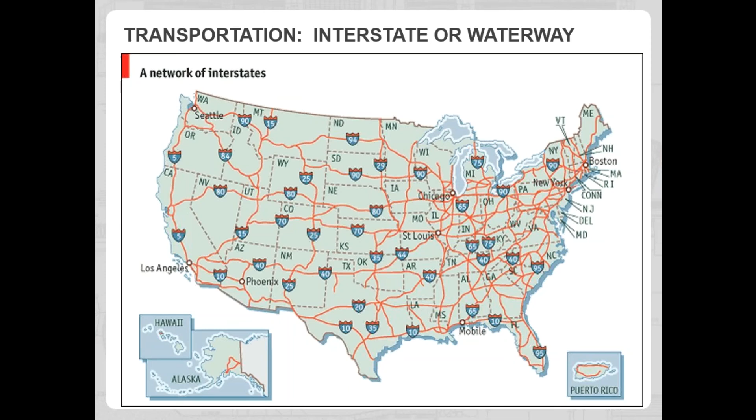Okay, so now let's get back to the Mississippi River. Here I want to point out the larger red circle that talks about the inland waterways, and that's what Chris is going to talk to you about, that larger system, the tribs, the Upper Miss and the Ohio River and their tribs that collectively come together for navigation and then down through the lower Mississippi River to the Gulf. And then we're going to talk specifically again on the lower Mississippi River, which is that yellow circle, with regards to the infrastructure that we have there, that hidden infrastructure. And with that, let me go ahead and toss it over to Chris, and we'll talk about navigation economics.

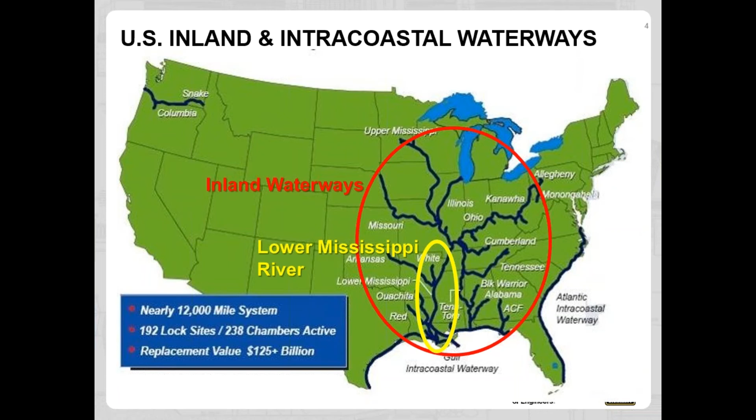My name is Chris Boko, and I've been an economist for the last 6 years with the Corps, dealing mostly with this hidden transportation system that Elizabeth talked about. So my purpose today is just to give a brief overview and an introduction into this.

So as Elizabeth talked about, why is the inland waterway system the hidden system? Well, it's because you can see and feel the trucks on the road as you're driving down the interstates. You can hear the trains or even have to wait at a crossing for a while. But people often don't notice the tows moving past them on the river. So I'm going to introduce you to this hidden system through answering a series of basic questions.

The first question is, what is the inland waterway system? This slide shows what Elizabeth was talking about, and shows all the inland waterway systems throughout the U.S., spread mostly in the East and Midwest, but you also have the Columbia Snake in the West. You also have the Gulf Intracoastal Waterway along the Gulf, and then the Atlantic Intracoastal Waterway stretching up from Florida all the way to Virginia.

This is nearly 12,000 miles and authorized for 9 feet or greater. The yellow lines represent the shallow draft portions, which are less than 14 feet. And the blue sections, one on the lower Mississippi and one up on the Columbia, represent the deep draft portions, which are greater than 14 feet.

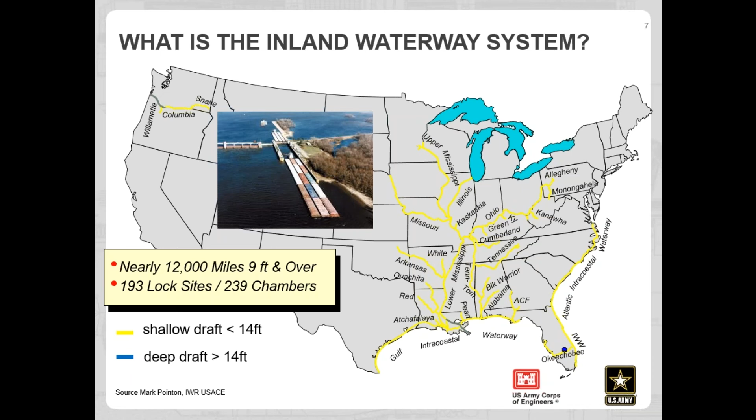So now that we've covered what the inland waterway system is, now we'll ask, well, how did it come to be?

Congress recognized that interstate commerce needed to be able to travel on these rivers all year round. So using the authority of the Commerce Clause of the Constitution, Congress tasked the Army Corps with building and maintaining the inland waterways system.

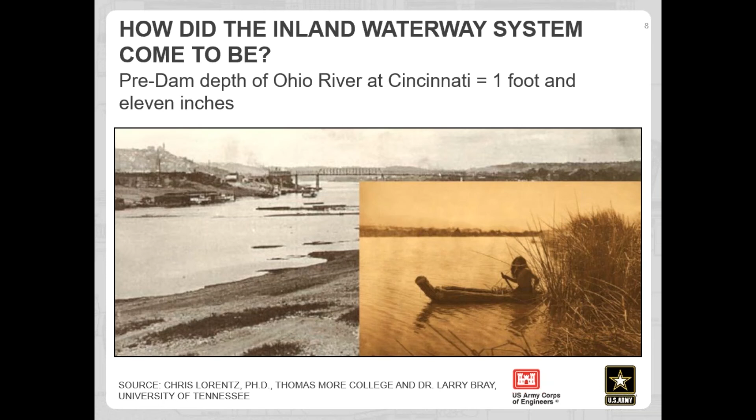The current project about to be completed is Olmsted Lock and Dam, which is right above the confluence of the Ohio River and the Mississippi River. Olmsted will actually be replacing the Ohio River Lock and Dam 52 and 53.

So now that we've asked what the inland waterway system is and how it came to be, now we're going to ask, well, what's moving on it? An average of 482 million tons has moved on the Mississippi River since 2007, with an average of 170 million tons of coal. The main commodity group moving on the Mississippi is coal and petroleum coke. Petroleum coke, for those who might not know, is the solid material left after oil refining.

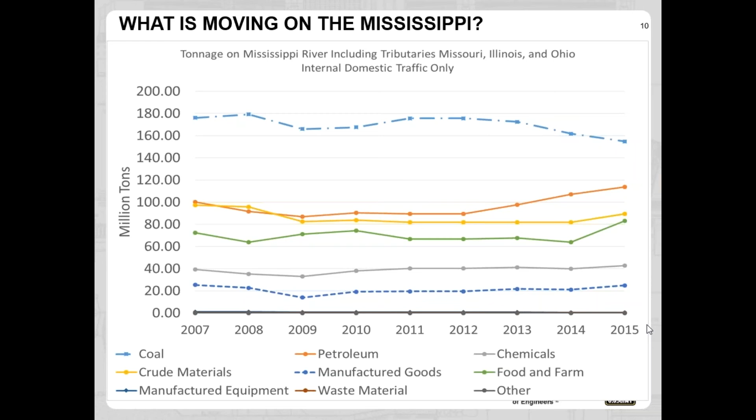So now we know what's moving on it. Why are they moving on it? Well, in one word: efficiency. One barge can hold anywhere from 1,600 to 1,750 tons, and actually even up to 2,000 occasionally, depending on the draft of the water. So a 15-barge tow can hold 24,000 to 26,000 tons. This is the equivalent of 216 rail cars plus 6 locomotives, or 1,050 large semi-tractor trailers.

This ability to carry more results in efficiency. Another reason barges are more efficient is because truck and rail often expend a significant portion of their energy for non-revenue purposes. For example, rail will expend almost half of its energy for not actually moving the freight. More than 30% is used for an empty backhaul. About 4% is reportedly lost or spilled each year. About 4% is consumed in just idling, and 10% is used in the locomotive yards, assembling and switching the cars.

Truck moves will also often occur empty. You'll have a truck ship from point A to point B with a commodity, but then it'll have to go over to point C to pick up another one. For the barge system, often you'll have a move that goes down the waterway, and then comes back up the waterway, both filled.

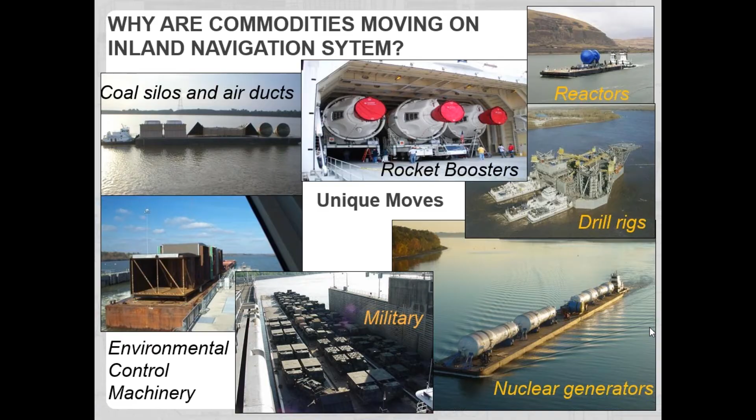Good afternoon, everyone. This is Zach Cook, Channel Improvement Project Manager for the Army Corps of Engineers here in the Memphis District of the U.S. Army Corps of Engineers. Today I'll briefly discuss some technical considerations from an engineering standpoint on the lower Mississippi River, and go over some of the hidden infrastructure items the Army Corps utilizes to support our navigation and flood risk management missions on the lower Mississippi River.

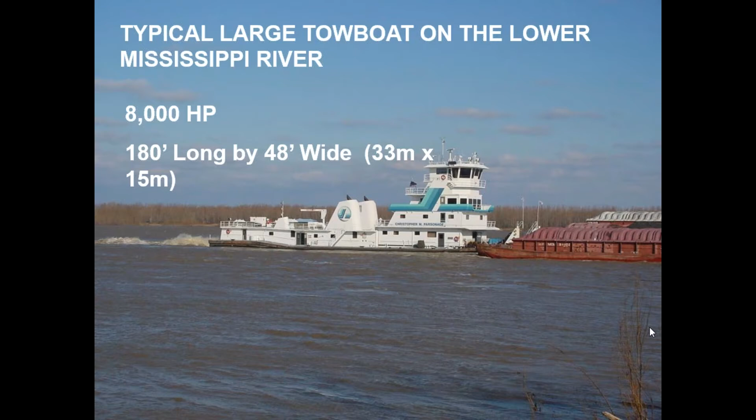As Chris discussed, there are various methods and means of transporting goods up and down the Mississippi River. I thought it would be interesting to show you what a typical large towboat on the lower Mississippi River looks like. As you can see, it's roughly 2/3 the length of a football field—for those of you who are football fans, imagine a towboat filling up about 2/3 of a standard football field. These towboats are very large in horsepower so they can push a large quantity of goods up and down the river. As Chris said, efficiency is key, and moving goods quickly and cheaply is the name of the game.

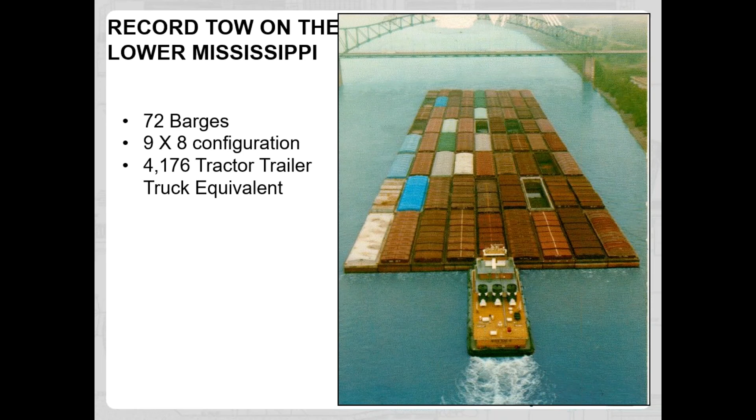This photo is a little dated, but it shows this particular barge configuration and towboat moving goods through the Memphis Interstate 40 bridge crossing in downtown Memphis, Tennessee. It was carrying 72 barges in a 9x8 configuration, equivalent to approximately 4,176 tractor-trailer trucks full of goods. The name of this boat was the Miss KD, and this picture was taken in the late 1990s—just a quite large operation that's ongoing daily, moving goods up and down the river.

Now let's talk a little bit about the lower Mississippi River itself, what we call the mighty Mississippi River, for those of you who may not be aware of the force of the actual river. The maximum flow rate, the maximum volume of water moved by the Mississippi River, is approximately 2.1 million cubic feet per second. That's roughly equivalent to enough water to fill the New Orleans Superdome two times every second. Just think about that for a minute - a volume of water moving past a particular point on the river to fill up the Superdome twice every second. It's hard to wrap your mind around, but that's the volume flowing past a given point during a maximum flow condition on the lower Mississippi River.

The river itself is a natural alluvial river, which carries a very large sediment load. There's roughly 240 million tons of sediment that it moves each year, approximately equal to about 213 tons per square mile of the contributing drainage area. The Mississippi River Basin drains roughly 41% of the contiguous U.S., and that's enough sediment to the contributing drainage area to account for 213 tons per square mile of that drainage area. So quite a bit of sediment.

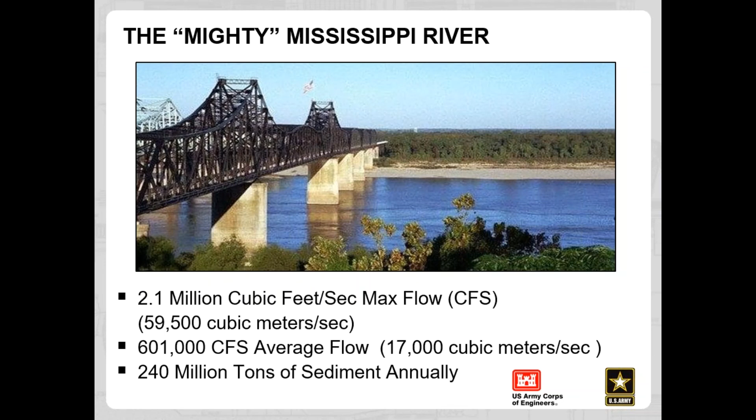Rivers in their natural state want to meander, and as they meander, they drop sediment out. Some of that hidden infrastructure that the Army Corps is responsible for assists in helping us maintain a safe and reliable navigation channel on the lower Mississippi River.

Let's talk a little bit about some of the technical aspects of this infrastructure on the lower Mississippi River. The map on the right shows the boundaries of the Army Corps of Engineers' lower three districts on the Mississippi River. The area highlighted in purple is the footprint of the Memphis district, the northernmost district on the lower Mississippi River. As Elizabeth stated at the beginning of the presentation, the Memphis district boundaries on the river begin at the confluence, the joining together of the Ohio and Mississippi Rivers. This confluence is near the southern tip of Illinois, near Cairo, Illinois. Roughly you're looking at this area here on the screen - that's the upper limit of the Memphis district boundaries and the confluence of the Ohio and Mississippi River.

As she stated, the lower river stretches from the confluence down to the Gulf, past the head of passes south of New Orleans, Louisiana, in the Gulf of Mexico, approximately 1,000 river miles. In the middle you'll see the Vicksburg district boundaries highlighted in blue, and the yellow outline is the New Orleans district boundaries. The three lower districts work together for this navigation and flood control system on the lower Mississippi River.

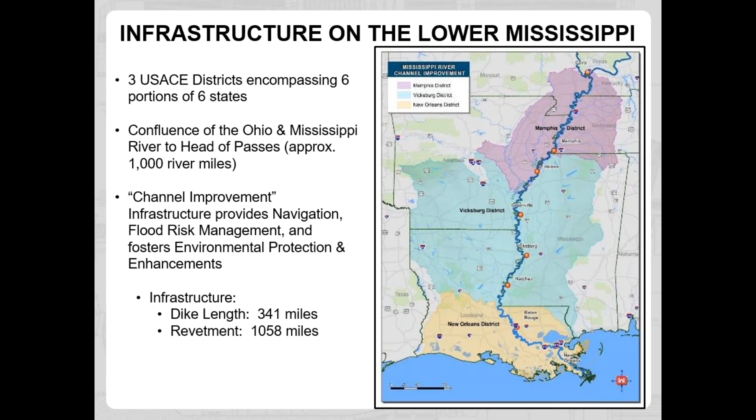Dikes are stone structures that are used to contract the channel width to produce the desirable navigation dimensions. Another one of our infrastructure features is called revetment. Revetment is a combination of steel reinforced concrete and riprap stone placed against the banks of the river to protect the riverbanks from erosion and help maintain the alignment of the river itself.

So what is our purpose? Mississippi River and Tributaries Channel Improvement. MR&T stands for Mississippi River and Tributaries Project. This was a project authorized by Congress to the U.S. Army Corps of Engineers as part of the Flood Control Act of 1928, after the devastating Mississippi River flood of 1927, where Congress authorized the Army Corps to begin making improvements on the Mississippi River for navigation and flood risk management purposes.

Our responsibility is to provide a safe and reliable navigation channel, and our authority for that, as given by Congress on the lower Mississippi River above Baton Rouge, Louisiana, is an authorized 12-foot deep by 300-foot wide navigation channel. That is the authorized channel for the lower Mississippi River.

However, at the present time, Congress has only authorized funding to require the Army Corps to maintain a 9-foot deep by 300-foot wide navigation channel. Keep in mind that we are required to maintain this 9-foot deep by 300-foot wide navigation channel at all stages and in all areas along the lower Mississippi River.

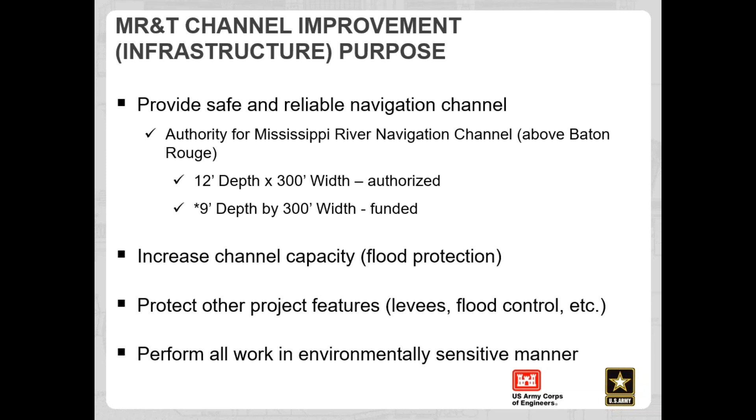So not only are we given this authority, but some of our other purposes are to increase the capacity of the channel for moving water, to protect other project features such as levees, flood control structures, and other features along the river. And again, we do all this in an environmentally sensitive manner according to environmental laws and regulations.

Some of our hidden infrastructure tools, as I stated, are revetments, dikes, bendway weirs, which are a form of dike, and dredging. Revetments, dikes, and weirs are all considered long-term solutions for helping maintain navigation along the river. Dredging is a short-term solution used for navigation to help maintain the channel.

The pictures you see here are some of the construction that goes on along the lower Mississippi River. In the upper right corner, you'll see a large excavator on a barge offloading stone onto a large off-road truck, and that truck is hauling the stone along the riverbank to be placed by smaller excavators along the bank. So that is placing stone along the riverbank for bank protection.

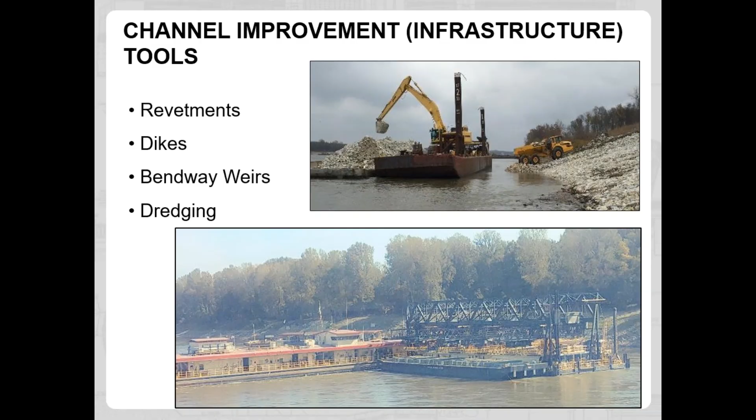The lower picture here is the Army Corps of Engineers mat sinking unit. This is a large government-owned piece of plant that works on the lower Mississippi River and places articulated concrete mattress, which is part of the revetment process. I'll be discussing the mat sinking unit and the revetment process in the upcoming slides.

So first, let's talk a little bit about revetments. What are revetments and what is their purpose? As I stated earlier, revetments are an infrastructure feature that's a combination of concrete and stone. These revetment structures are the first line of defense in the river itself to help protect the Mississippi River levee system, maintaining the navigational alignment of the riverbank. They also assist in keeping excess material out of the channel and help us maintain favorable channel alignment and depth.

So again, our objective with revetments is threefold: we want to preserve favorable bank alignments, provide efficient cross-sectional areas, and help prevent the river from creating new meander patterns. Because a river in its natural state wants to meander, and so our job as engineers and as the Army Corps is to help train that river as best as possible and guide her along her way as she makes her way downstream.

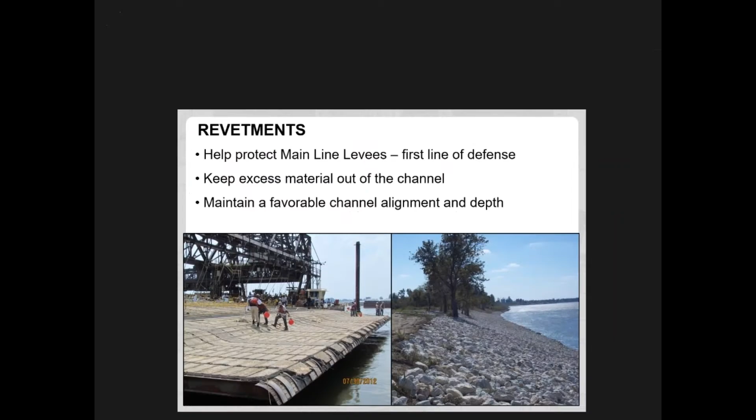I think someone had a question there. I'm not quite seeing it, but Jeff, can you tell us what that question was, and I'll see if I can address it? The question was for the previous slide, and the person is asking, can you talk more about what we're looking at on the picture on the left in the revetment slide? Yeah, this slide here. So yeah, what you're looking at on the, okay.

On the left is a picture of the mat sinking unit deck, and the articulated concrete mattress that is on the deck of the mat boat. I'll be talking about that here in the next few minutes. On the right there is a rip-rapped bank that is protected after the articulated concrete mattress is placed. I'll discuss that more in the coming slides.

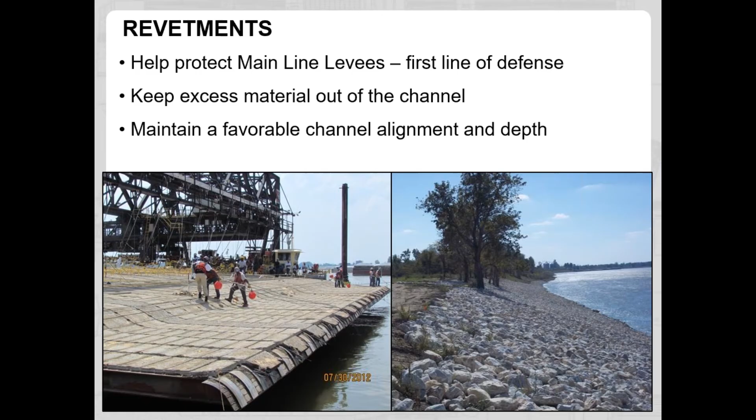So moving on, let's talk a little bit about revetment construction. Through engineering, through the process of collecting surveys along the river, looking at channel alignment and depth, once the design engineers determine which locations require revetment, that begins our revetment construction process.

So the mat is placed on barges. We have locations along the Mississippi River where we store the concrete mattress, where it's cast, formed up, and stored for usage along the river. We have a casting field at each of the lower three districts: the Memphis district, the Vicksburg district, and the New Orleans district.

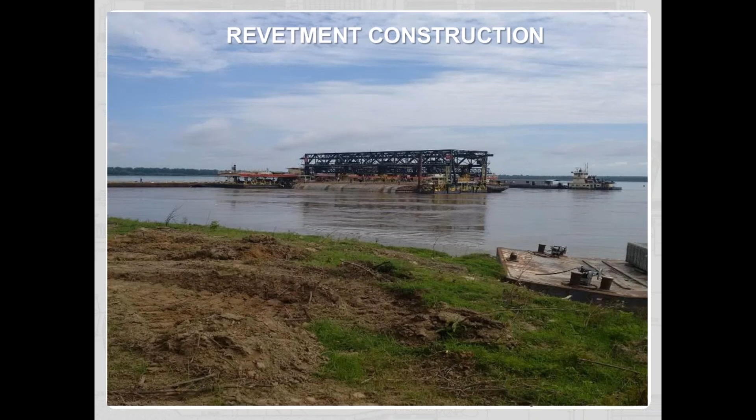So this process, with each succeeding mattress, overlaps the previous mattress - done in a manner similar to placing shingles on a roof. There's an overlap of each section of mattress as the mat boat moves from downstream to upstream. Once the ACM is in place, the areas of the unprotected graded bank above the water line are protected with graded stone.

The next few slides show photographs of some of the various processes related to the revetment sinking process. Each new revetment location is first cleared and snagged of trees and other vegetation as needed, in advance of the bank grading operations. The Army Corps makes every effort to not completely clear the bank of all large trees, but to preserve some of the larger trees. We only remove those that are necessary for construction operations.

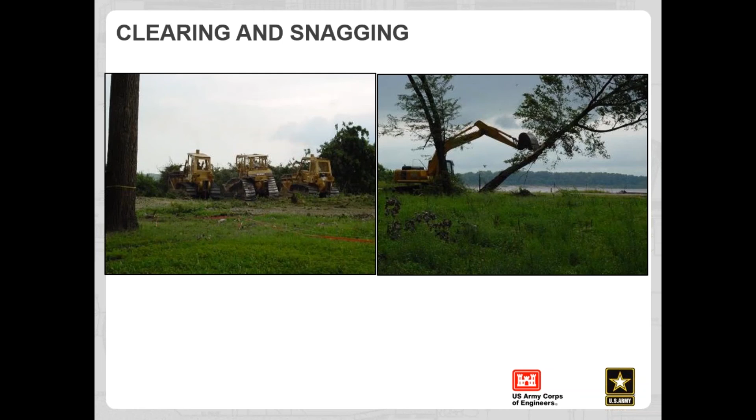So you can see here we've got bulldozers and some excavators that are doing some clearing and grubbing of the vegetation and the trees.

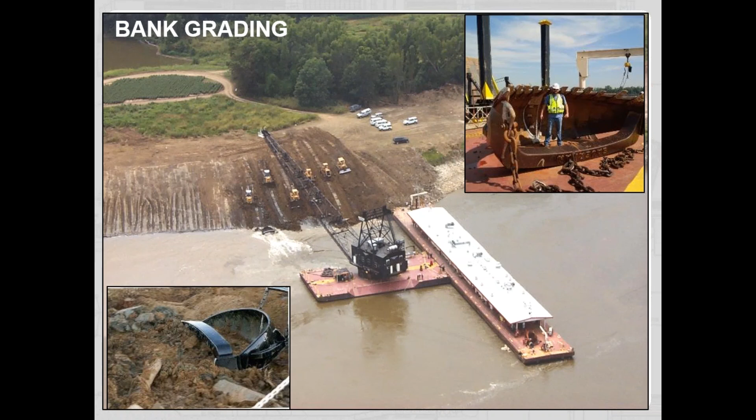The bulldozers perform the majority of the grading and shaping of the bank above the water line, as you can see in the photograph here, whereas the dragline does the majority or all of the underwater grading of the slopes.

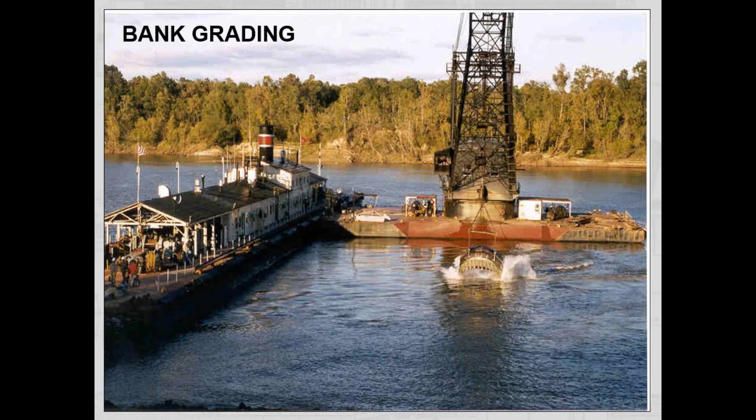So once the bank is graded, there is a period of time, depending on the schedule, where the banks are left exposed. The typical construction season for revetment and mat sinking is in the late summer and into the fall of the year, which is typically when the river itself historically is at its lowest point. We would like to have the river as low as possible when performing the mat sinking operations so that we get the best finished product possible. So this work is done during the typical low water season.

However, the river does fluctuate quite a bit, and there are times when the river levels may come up and go back down, so we have to have a way to provide some level of protection until the mat sinking unit gets to the site. This is done with some basic gravel, placed by an excavator or a dragline. We put the gravel from water's edge at the time of grading in strips approximately 30 to 50 feet wide, as an interim level of protection for those freshly graded riverbank slopes.

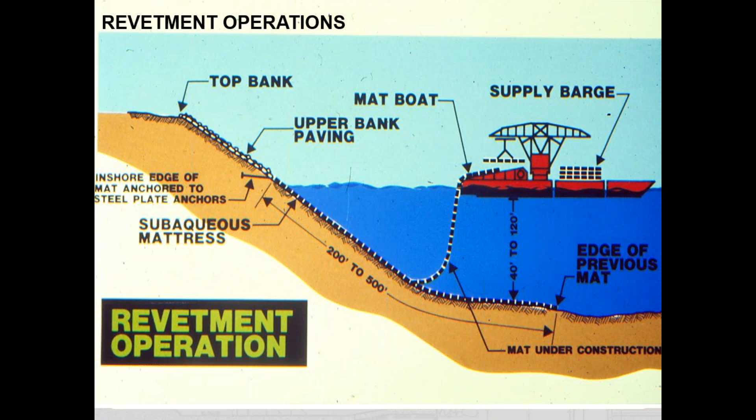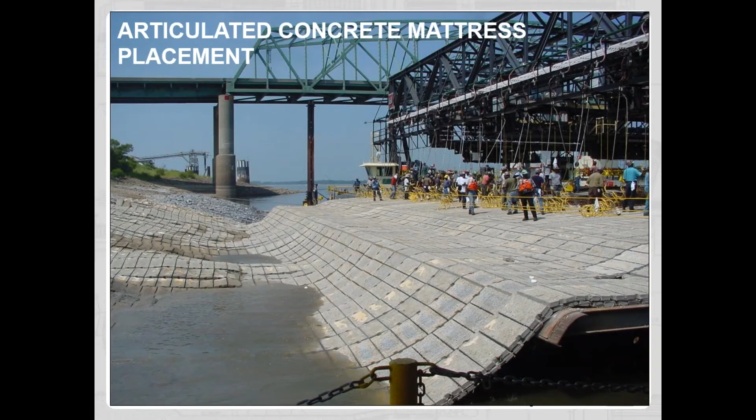In the interest of time, I'm going to skip these videos. I have several videos of the mat sinking unit in action. I'm not going to play those now, but I believe they have been put out on a website for you to download and look at later.

What you'll see here is a video of the overhead cranes that are used to pick the mat up off of the mat supply barge and onto the deck of the mat sinking unit.

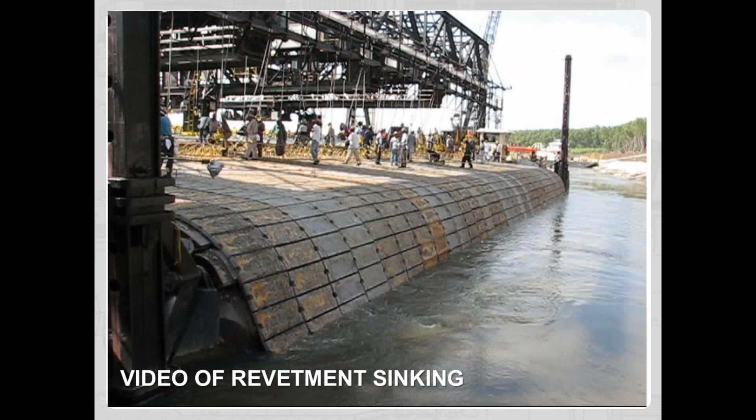Again, this is just a video of the revetment sinking. So the previous picture where you saw it coming off the deck of the barge, you'll see that here in this video.

Finally, as I stated, the last part of this revetment process is to place the riprap upper bank paving above the water line on the freshly graded riverbank slopes.

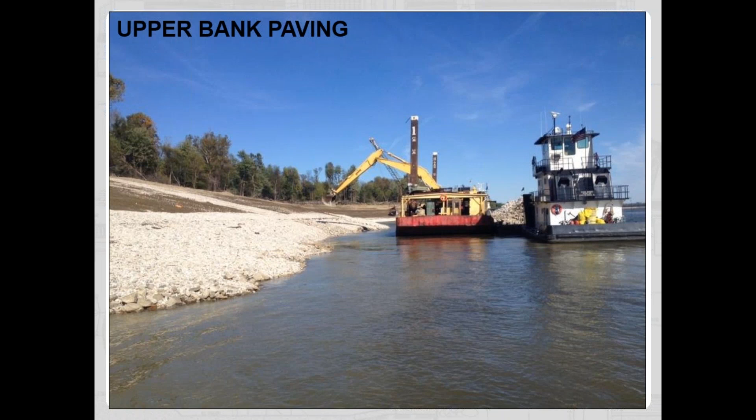Now I'm going to transition over quickly and talk about river training structures, which are other features of that hidden infrastructure.

River training structures are navigation features constructed of stone, and they are used to contract the channel width and scour the riverbed to the desired depths. There are several types.

We have transverse dikes, shown in the upper left corner. These are stone navigation structures built perpendicular to the flow at various heights relative to the riverbank, and they force the energy of the water away from the bank and towards the center of the channel. This is used to scour the riverbed and help provide the depth and width needed for that 9-foot deep by 300-foot wide navigation channel.

We also have other dike features called lateral or trail dikes, shown in the upper right-hand corner. These are stone dikes built parallel to the flow of the water, acting as an off-bank alignment for the channel. We construct these in bends of the river in areas of excessive width, serving as a bank alignment for the edge of the navigation channel.

The lower left here is a Bendway weir. These are dike features or stone navigation structures, but structures you'll actually never see. You can see in the graphic a towboat with barges navigating over the top of these Bendway weir features. They're built low, roughly 20 feet and lower below our ordinary low water stages.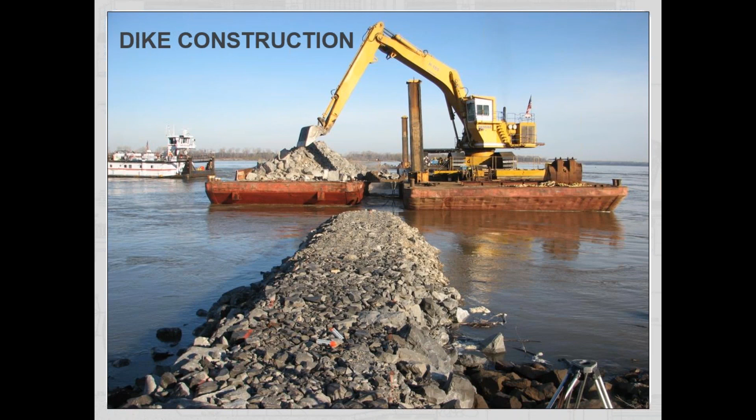It's done by a large excavator or a hydraulic drag line. Here's a photograph of a drag line, and something to note - the difference with this piece of equipment is it uses what's called spuds, long pieces of movable steel used to anchor that equipment barge in place, going down to the bottom of the river. In areas where the river is too deep for the spuds to reach bottom, they use anchors placed in the riverbed to hold the equipment in place.

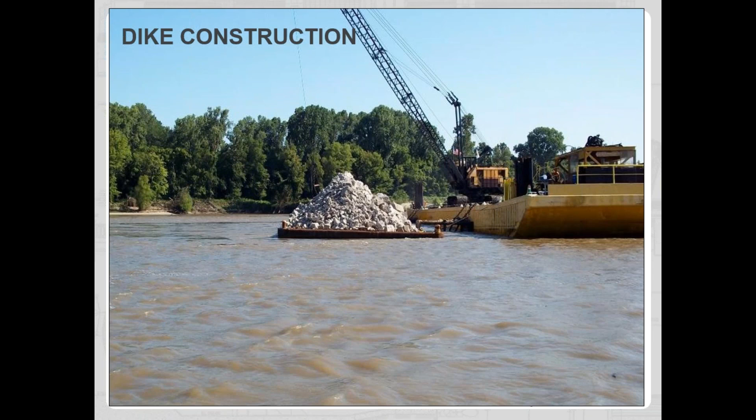This is a cool photograph, just a depiction of the large graded stone A, which is a maximum of a 5,000-pound stone. That is the primary size of stone used for constructing dikes. As you can see, there are some boulders in this stone that could be as large as a man.

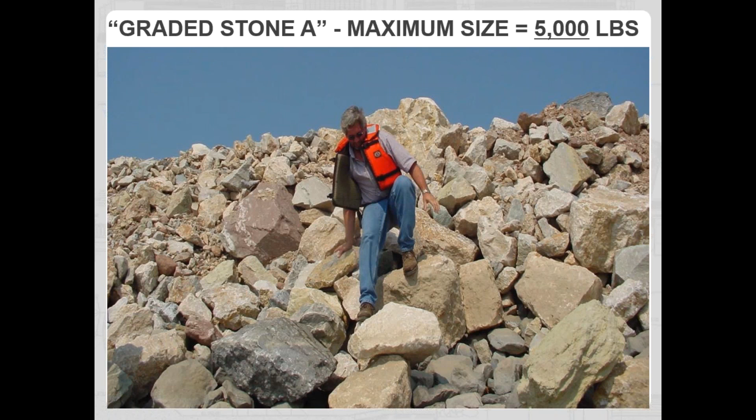I have a video for dike construction. You can download that and view that placement of stone. I've already talked about bendway weirs.

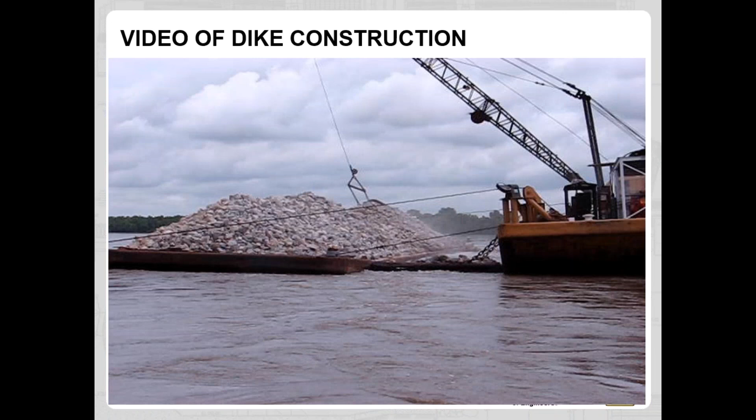The way that we do that, we incorporate environmental features into our dike designs. We basically call them notches. Notches are the degraded portion of the dike that would allow flow to pass through the structure during certain stages. We do this to allow for flow in some of these back channels in areas where these species habitats are located.

As the water stages drop and navigation needs immediate assistance for the proper draft, the short-term solution is dredging. I'm going to turn this over to Ms. Vicki Watson, who is an operations project manager for navigation here in the Memphis district, and she's going to talk to you a little bit about the dredging part of our project.

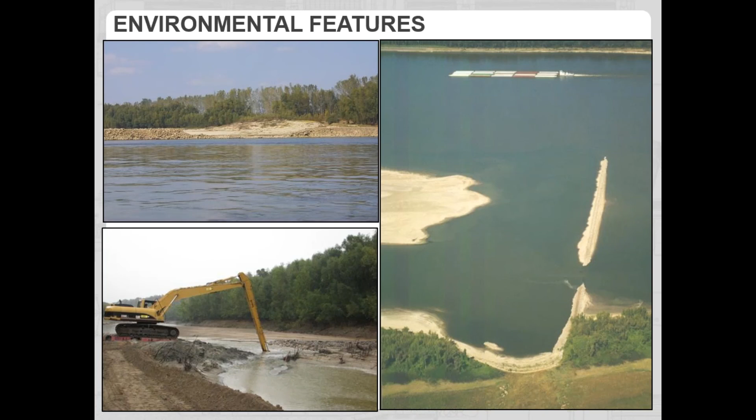Good afternoon. Yes, my topic is very specific to the navigation channels. The main stem dredging, once again, is the channel improvement dredging, and we call main stem the Mississippi River itself. Along the Mississippi River, we use government-owned motor vessels.

We have the dredge Hurley and the dredge Jadwin, which are dustpan dredges. Basically, they have a device underwater that hoovers or vacuums along the bottom of the river and discharges out through a pipe back into the river. We're trying to maintain the navigation channel. Chris mentioned earlier the draft of the water. We're trying to maintain a 12-foot channel in the main stem, the Mississippi River.

Another type of motor vessel we use is the dredge Wheeler. That is the hopper dredge. It is also a similar type of dustpan dredge, but it maintains the material inside of the vessel where it contains it, and then hauls it off to another location to dispose of the dredge material.

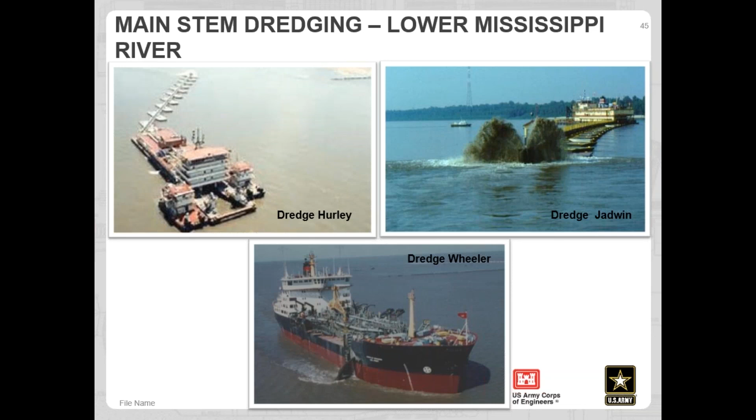We have 12 harbors in the lower Mississippi. This is photographs of 9 of them. They are all shallow draft. We maintain navigation channels of less than 12 feet. The harbors go all the way from Hickman, Kentucky on the upper portion, all the way down to Vicksburg, Mississippi. Some harbors are natural harbors where the river meandered previously, and now they are shallow draft harbors.

Some we have constructed. There's a photograph of New Madrid County Harbor. That is a harbor that the Army Corps of Engineers constructed several years ago. So we have navigation channels in all of those areas.

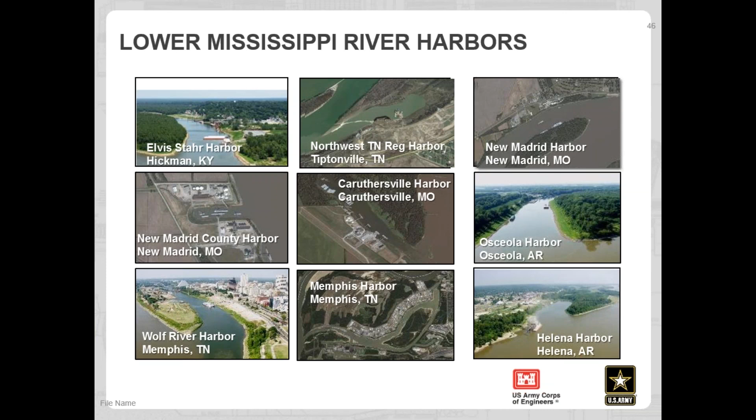In the harbors, we actually prefer to use a dredge called a cutterhead. If you think of a beater like a mixer, and the mixers that are attached to it, and then apply teeth to those mixers, this material goes along the navigation harbor and it's chewing up the material that's deposited. Chris mentioned earlier that there is 240 million tons of sediment that flows down the Mississippi River, and as the river fluctuates up and down, a lot of this material is deposited into the harbors, and it's mostly comprised of sand and silt. So the cutterhead can go in there and chew up this material.

It mixes with the water in the harbor, discharges it through a pipeline, and in some areas we discharge back into the Mississippi River in areas known to have swift current and much deeper areas. And then in some areas we actually have upland disposal areas.

Now the advantages to a cutterhead is the material is conveyed through this pipeline, so we can move the material where we need it to go. The cutterhead also works much better with defined profile channels. Some of our channels are 250 foot wide, some are 150 foot wide, but the way the cutterhead works is it swings back and forth left and right so that we can define how far we want them to maintain the width of the channel.

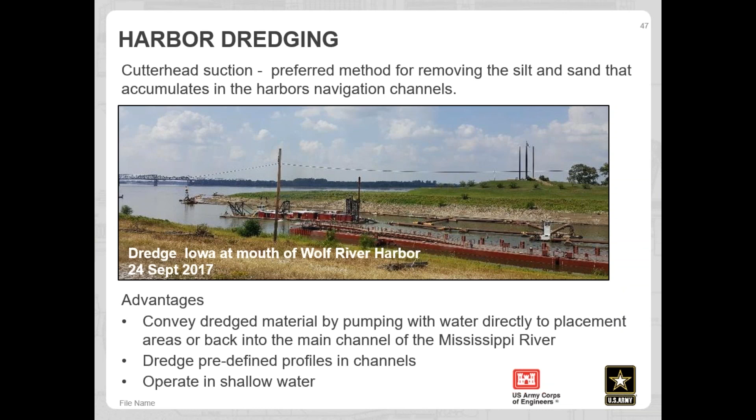Disadvantages to the cutterhead are that they are limited to depth. So if the water rises too much, we would have to halt dredging until the cutter head could reach down to the bottom again. We are also diluting the dredge material with a lot of the river water, so in areas where we have containment, we have to allow for the water to settle and drop out the material because there is a high dilution rate.

The distance in which the dredge can pump the material can be expensive if you have several thousand feet of pipeline. And then mobilization - it is not unusual when we do a contract dredge that the mobilization, demobilization charge is $1 million. That $1 million is paid before any dredging can be done in any of the harbors.

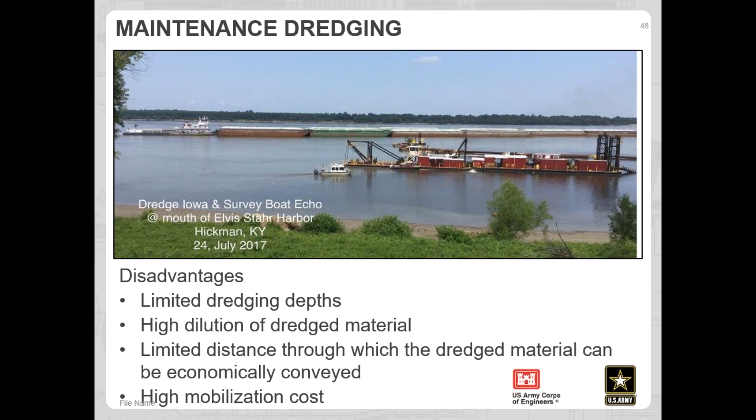Before any dredging can be done, we also have environmental sensitivities. Dredging cannot begin until July 1st. We have to consider the endangered species of pallid sturgeon, so we are required to wait to dredge until July. We also have to maintain permits from each state, letting them know where we plan on placing the dredge material, either back into the river or into containment areas, where the water eventually comes back out and the sediment is left in the leveed areas.

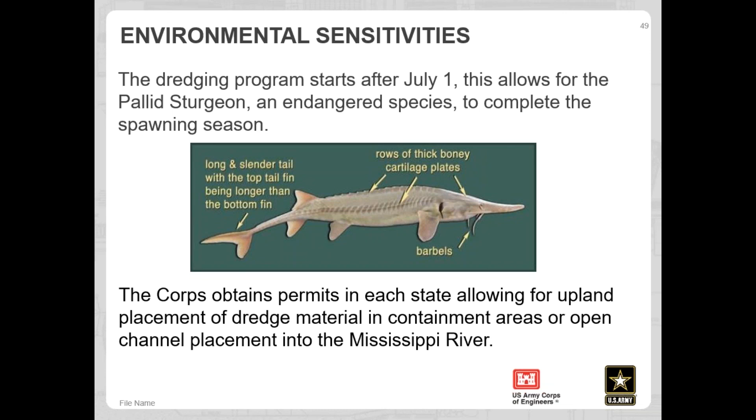I know that was very quick, but I know we're limited on time, so I will transfer it back to Elizabeth. Thanks, real quick - we really appreciate everyone's time and interest in the Mississippi River. I have a couple more slides that I think will help pull it all together, real quick, if you can stay on. First, infrastructure brings value to the nation.

I think we've talked about that with flood protection and navigation. You saw the infrastructure with dikes and revetment, and also short-term solutions with dredging. What I really want to draw your attention to is this bottom information where it talks about corn production.

There was something published in 1996 for prices of corn, and it shows the difference in production between Iowa and Argentina. You can see as far as growth and harvest, it's a lot cheaper to produce corn in Argentina, but when you add transportation costs in there, your total to market price is going to be a lot cheaper if you grow, harvest, and transport in the U.S. than you would in Argentina. So for Iowa corn, your total cost was $3.01 versus Argentina's $3.21.

So as far as world economics, our transportation costs provide better efficiencies to get our goods to market. So that's really, in a nutshell, why infrastructure is so important on our waterways.

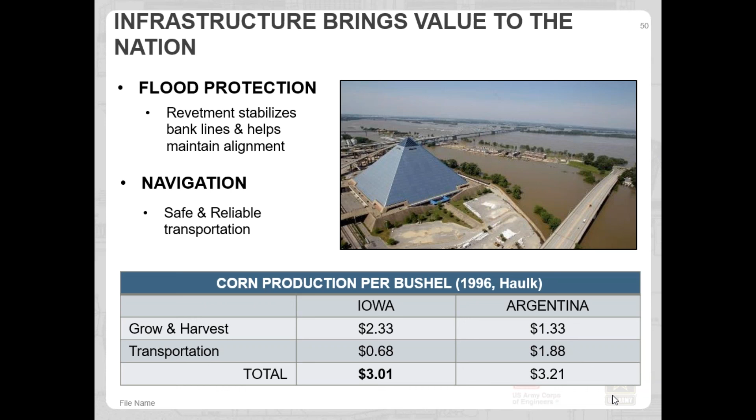The next slide talks a little bit about what Vicki mentioned, the fluctuation in our rivers. On the left, we show a picture of Memphis. There was a historic flood in 2011 throughout the lower Mississippi Valley, and this was a good snapshot for the Memphis area - a flood in 2011 and a massive drought in 2012. You'll see below the stages where we had a 48 stage in 2011 during the flood, and then a -9 stage in 2012 during the drought - an elevation difference of roughly 60 feet. There are not many rivers that can handle a fluctuation of 60 feet and continue to be reliable.

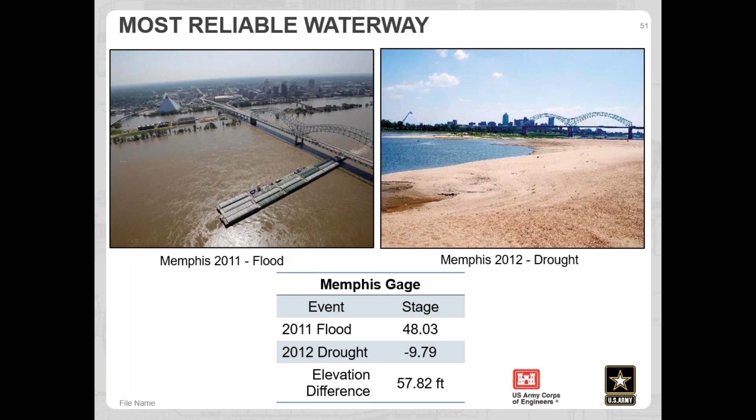All right, next slide, and this is our last slide. Because we have infrastructure and bring value to the nation, because we are that economic artery, because we can provide reliable waterways to get our goods and commodities to market, we're a worldwide leader, and we're working with other countries to share our lessons learned on developing watersheds.